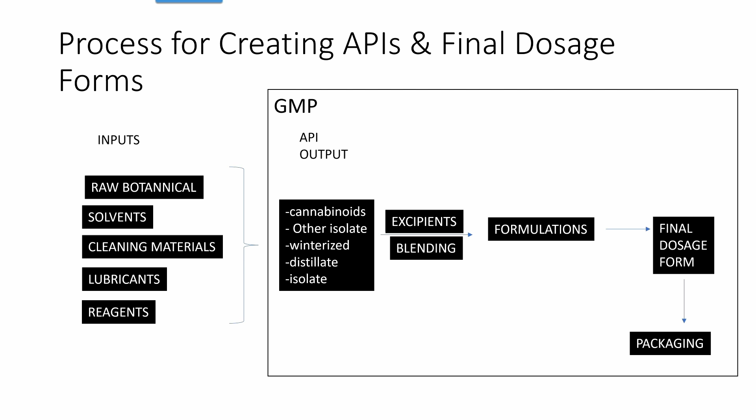Anyways, we've all seen this. We've talked about it so many times. This is the basic layout for the process for creating APIs. You have your inputs, which are your raw botanicals, your solvents, your cleaning materials. You could add into that now people. You can add in facilities. You can add in now the environment. There's many layers of complexity with this, but just try to keep it simple. Basically, you have inputs with API outputs.

API meaning active pharmaceutical ingredient. Those outputs, in our case, may or may not be cannabinoids, or distillates, but they could be other things, beneficiated oils, flavonoids, anything with a chemical specification. We talked extensively about chemical specifications and how that's important when you really define all that stuff. Got some formulations, you add those cannabinoids in with the formulations, then you get final dosage forms, and then you go into the packaging.

So we've been talking about these subjects for several weeks now, going through the Q7, which is the ICH GMP, the good manufacturing practice. It's codified into law in Europe, it's guidance in the US. It still is used. We've actually read from the Q7, so if you get a chance and you want to go to sleep, there's a lot of really good items in there. One of the things you really need to think about with a layout is you need to follow a development process.

We have talked extensively about the process of creating a layout. So far, we've talked about a risk assessment. We've talked about identifying critical processes, critical steps in the process. We've talked about external contamination, internal contamination.

So, anyway, getting back to that basis of design. It's so easy to get off topic. Yeah, when you go into the basis of design, it's just a set of codes. And usually when you look at a plan, maybe the first 6 or 7 pages are just a bunch of writing. Well, that's where the basis of design is at. Okay. And that's where they're laying it all out. Gotcha. And the plan that comes after that basis of design should correspond with that basis of design.

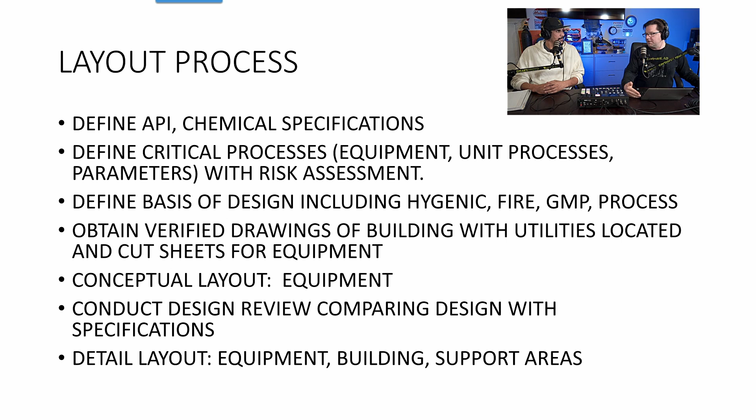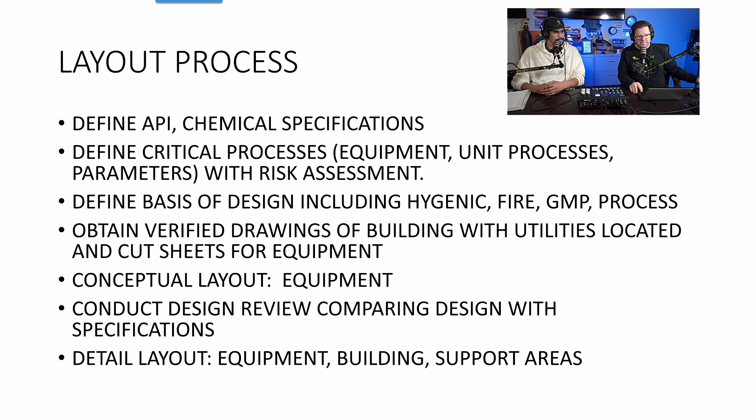Yeah. If it violates it, there has to be something else, like a different exception that maybe has to be a note in there that says, okay, this takes place with process and the equipment. Sometimes complying with it is impossible with just straight up layout and design. So conceptual layout, we get the conceptual layout, we do the design review, and then we do the detail layout. So very similar to what I just talked about, but it's really important that you get the stakeholders right.

Yep. And typically you want to have more than one person. You don't want to have just the subject matter expert. Put all your eggs in one basket. No, not a good idea here. You got to have that QA person there. How are they going to save money if they got to hire 10 different guys? No, that's 15 people. That's the problem.

Okay, we're just starting out. We got 2 people. We're going to do a GMP. Okay, who's your QA person? Who's your architect? Who's your subject matter expert? Where's your process engineer? And they're like, oh, we don't have any of that yet. Okay, we're just going to get going and we'll be GMP and whatever. Right. There's no GMP light, right? That's what a lot of people say. Oh, GMP light, it looks like GMP. Either you can pass the muster of going through the process or you can't. Yeah. These are the types of people that you need to have on your team.

Obviously. You need to have an architect, because the architect is different than the designer. Right. The designer is going to take into account all the process. They're going to take into account the utilities, the equipment, where it all goes, all that stuff. But they're not going to really do the architectural work, which is really defining how many feet of pipe they need. Or does that kind of fall to the designer in the layout? The designer would do some of that work, but he wouldn't probably do anything like defining all the

hygienic aspects of the facility, the surface finishes, all the details of the offices and stairs, and typically an architect will also work with an MEP engineer, which is mechanical, electrical, and plumbing. Okay. That's an engineered plan that goes with the architectural plan, which is the layout and all that stuff. Yeah, so you can see you do need a team. It's going to run into some cash as soon as you do this.

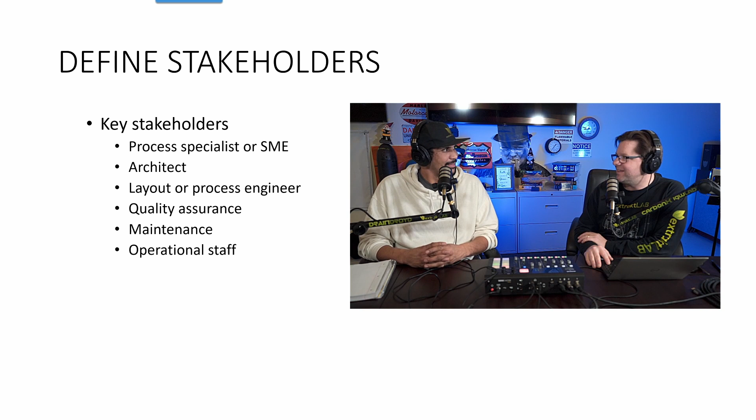We built stuff without drawings before. It's happened once or twice. Oh, we did, yeah. And it's difficult. I would say that it adds a level of complication. What ends up happening is you end up having to build it twice. Go back and fix things, and so design build. That's where basically you have no plan and you're just going in there saying, hey, go do this one. That's a really good way to spend $1 million on electrical or whatever. Yeah. It's almost better to have the plan, and then you can understand what your costs are going to be and get quotes and things like that.

So that makes it easy. Define layout scope. Okay, well, there's process areas and then there's non-process areas. So you've got your utilities areas. These are not really controlled areas. Your gowning rooms. Your laboratories, they're not necessarily controlled from a GMP standpoint.

Remember we had talked about the levels of control a couple weeks ago? So the levels of control are: if there's exposure of the API to the atmosphere, it has to be controlled. In other words, the surface has to be closed, the room has to be controlled. And so then you define all those levels of control and what that means in terms of the surface finishes, the ceilings, the windows, all that stuff. And then the pressurization in the room, the level of filtration in the room, all that stuff.

These non-process areas typically are level 1 areas. In other words, there's no control. You just have to keep it clean, that type of thing. An exception would be the dispensing, filling, sampling room. These can be level 3, a little bit more control. If you have your API going in there and it's being exposed to the atmosphere, then that would be a level 3 room. A level 2 room is a protected corridor between a level 1 room and a level 3 room. So a level 3 room is the highest stage of a room.

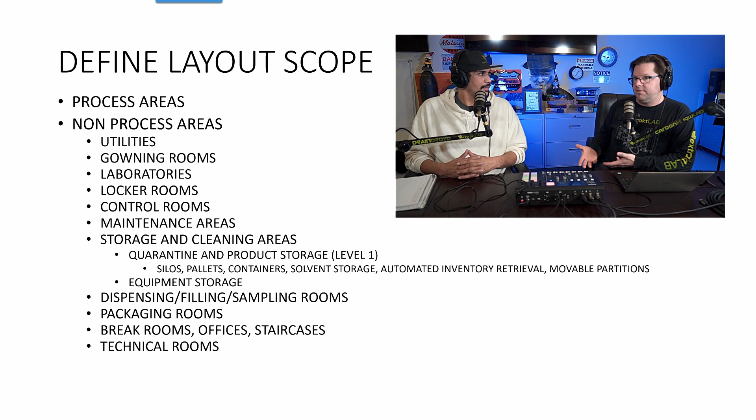A good example, we've been doing some silo work for hemp, and that's all contained. So it actually can be outside even. Yeah, but it's enclosed within its own area. Exactly, so it's all enclosed. Pallets that are wrapped, marked, typically barcoded, also would meet that, as would contained solvent storage.

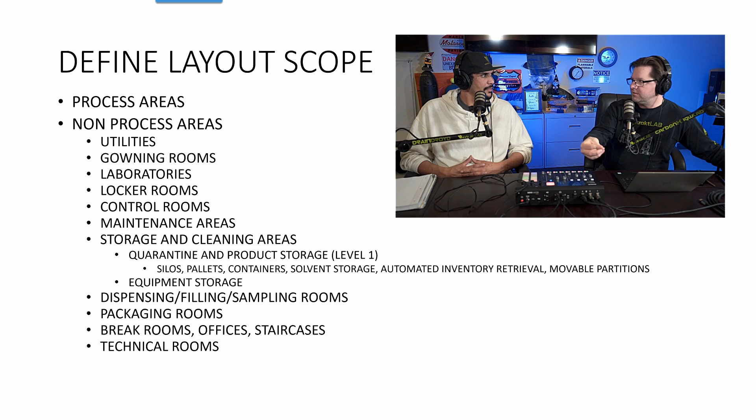So there's lots of different things, but when you think about the layout, you need to be thinking about what are my process areas corresponding to my critical and non-critical processes, and also those support areas and how they interact together. It's a bit of work to really think about all that. And there's a couple tools you would use. Typically what we do is an accommodation schedule. It's just a bubble map of how things interact together with the given processes.

It's just a very nice, easy way to say, here's my process. Like we said, there's different processes for different people, right? So this is going to change depending on what you're going to do, and it's also going to change based on the risk assessment you do. Absolutely. And people assess risk in different ways. That's why you need inspectors there to take a look at it. There's no such thing as one size fits all.

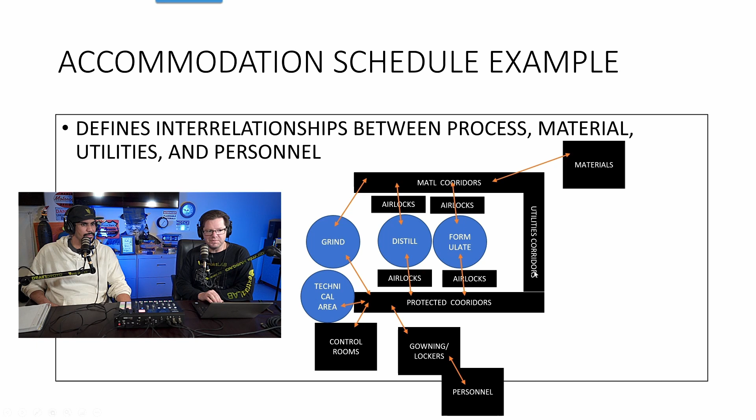Obviously here we have no interaction between utilities, but that's not actually how it is. There's glycol units that typically go in and out of a room. There's HVAC that typically goes in and out of a room, whether it's a hood or filtered simple air, venting. We got pneumatics or vacuum. Maybe you don't put the vacuum inside of the room, sometimes people do, but it's better if it's outside the room and you just pipe it in.

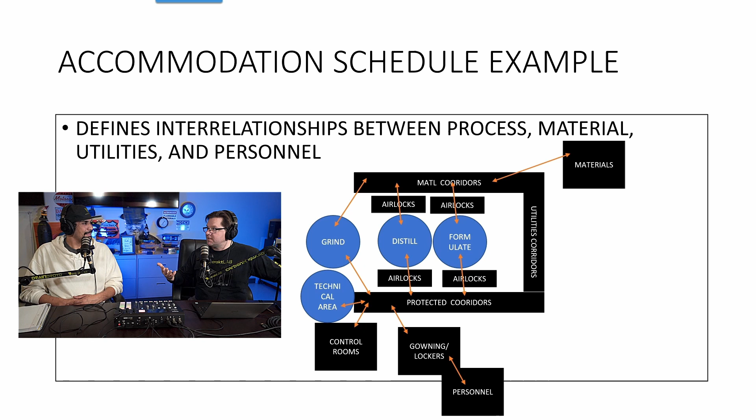I think we hit a lot of them, but some of the utilities can get very complicated. Oh, cryogenics, like with CO2, right? So a typical extractor would have a cryogenics loop, a glycol loop, maybe a heating boiler loop, an air loop for all the valves, and a venting loop. So you have basically 5 or 6 process connections, including the electrical, just for that one piece of equipment.

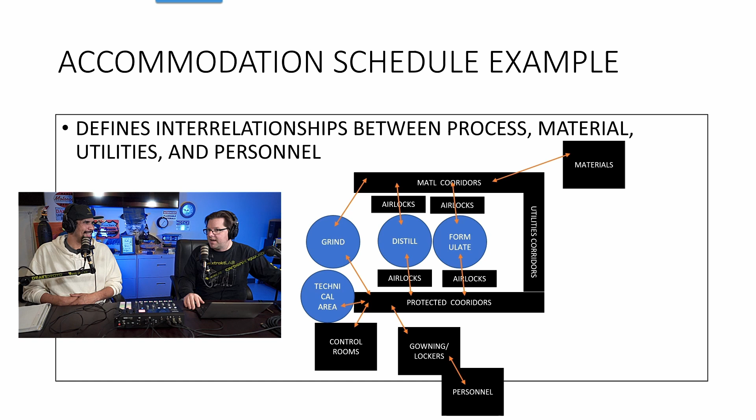And then those things also have proximity requirements. This has to be this close and it can't be this far away, or it's not effective. You don't want to put your vacuum pump 50, 100 feet away.

For example, grinding and extraction. Is it required? Probably not, but it's important that it's close, for efficiency. You're not going to tramp around with raw material coming out of your grinder, bringing in the dusty grinding material through the distillation room, through the solvent removal room.

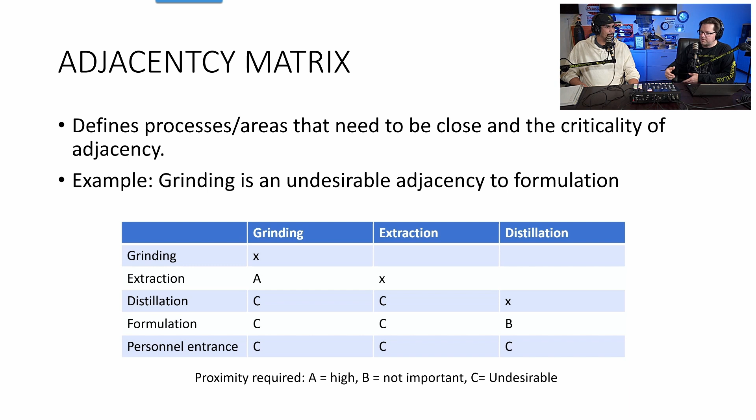This is pretty much common sense, guys. If you do the adjacency matrix and the accommodation schedule, these two things really work together to give you what you need to do an initial conceptual layout, so you can know how everything is.

We've had engineers who say, okay, I've done lots of GMP engineering, I know everything about it, I've done pharmaceutical facilities around the world, great, good for you, so I can do everything.

So they go in there and they don't do the adjacency matrix with us. You're like, okay, how much have you really done it? You're not even asking the right questions, they have a very narrow scope. They didn't do the accommodation schedule with the equipment and the personnel and the process, and they haven't done the risk assessment, so they're just going in there blowing a lot of smoke.

And at the end of the day, you have to make sure that these things are taken into account.

One of the things that a subject matter expert would really bring to the table is maintenance areas, cleaning areas, introduction of SIP or CIP systems—clean in place systems—for how that's done, and where all that stuff should be housed relative to the process. So you really do need to have the conversation, make up your adjacency matrix, and do your accommodation schedule, because if you don't do that and then you do the design, you're going to be doing it again.

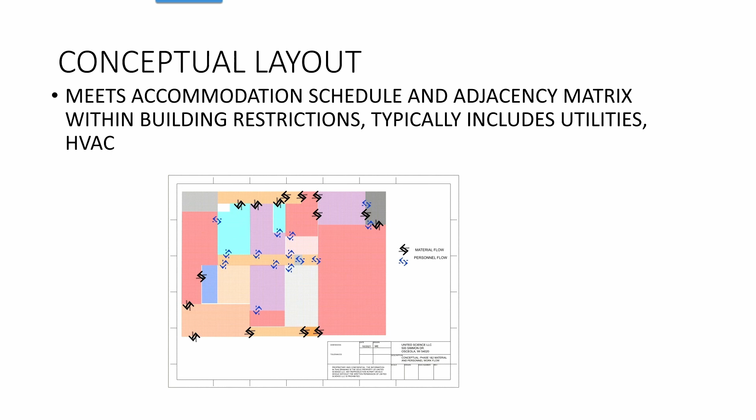The way I like to do it is I like to think about this plan and think about where's the possibility of dust occurring. So then in that area, if it's intermittent dust or whatever, I like to put it under a negative pressure, and then design or conceptually lay out what that HVAC might look like with those negative areas of pressure. It's all being built around that.

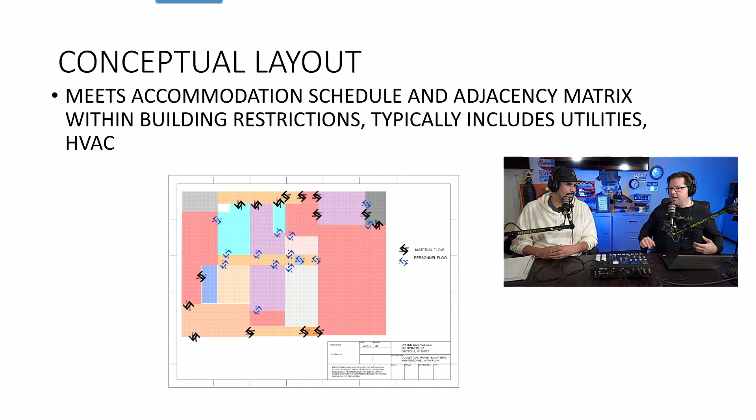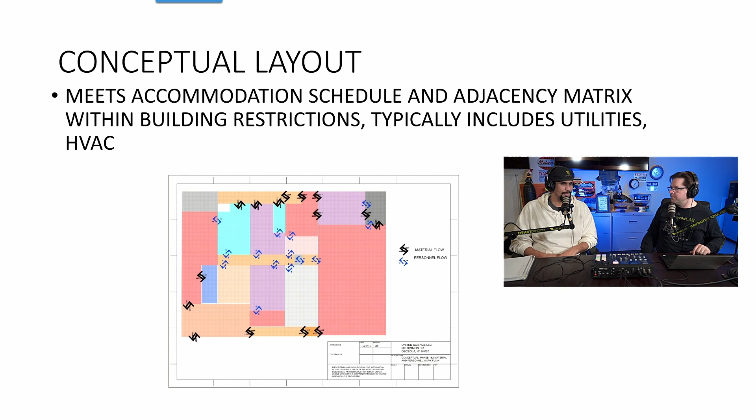You probably don't want to have, for example, your solvent areas, if there's any solvent exposure at all, under a positive pressure, because it would blow the solvent out into the other rooms and contaminate those areas. So relative to the hallways, suppose you have a solvent area right here in this purple area—you probably would want to have maybe this negative pressure, and maybe this just a positive pressure. Typically what the HVAC engineer would do is take that design and say, this is what I need to think about, and then they would specify the relative pressures for each of the rooms. So it works together.

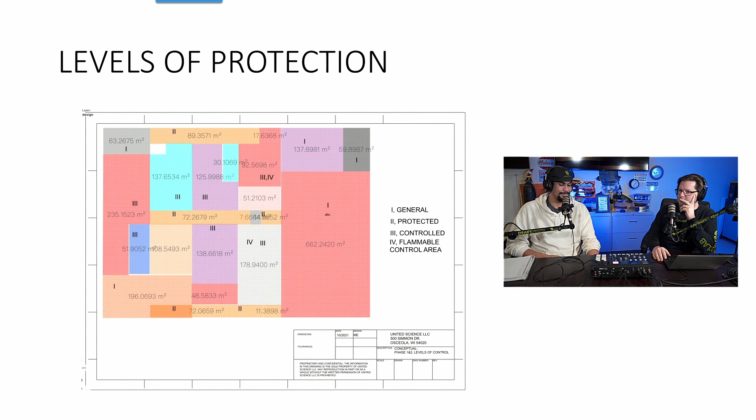Trying to cram too much into too small of an area. The Q7 says you really need to have adequate space to run your facility. There are some critical dimensions associated with the equipment — for example, you have to have 2 feet around, or 3 feet clearance, with some pieces of C1D2 equipment. You can't just stick it up against the wall and say, hey, I got enough room.

If you only have a 10-foot by 10-foot room and a piece of equipment that's sticking out from the wall 3 feet, that means you only have 4 or 5 feet left on that side. So you have 4 feet left — that's not enough room to actually run a process in there. You need to have enough space in order to get that done. So that's something to think about.

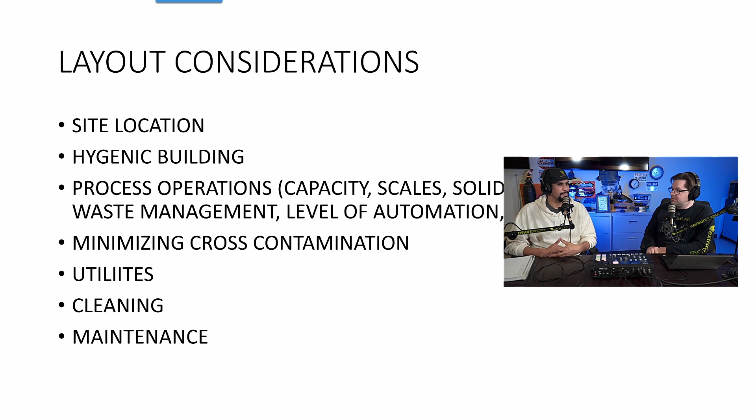So speaking of layout considerations, here are just some things that are on the top of my head. Site, obviously, we talked about that. You don't want to put your place next to a cyanide plant or a pig farm, or downstream of the prevailing wind from a Dow chemical plant, or in a place where there's heavy amounts of smog because there are too many ethanol extraction guys in there — an extraction hygienic building, for example. That's one thing you need to think about.

And we talked a little bit about some of the principles there. Last week James and I talked a lot about just the requirements for hygienic buildings. I don't think any of these things are hard rules, like you absolutely have to have them, but there are some things you need to be thinking about.

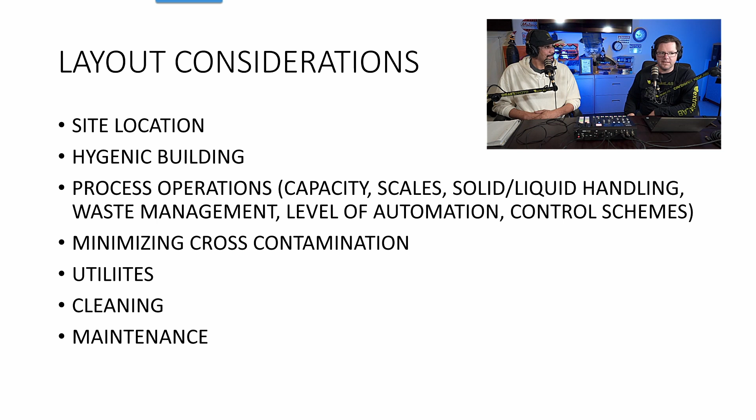A lot of this also has to do with what your general philosophies are associated with automation. If I'm going to be like an uber-automator guy, I'm probably going to have a different facility than if I don't mind manual, discontinuous processes. One thing that we've been doing is putting all of our processes together, for example, extraction all the way through distillation.

Are they ready to hear about that continuous processing? Exactly, so you get it out. We could bring it all the way through. What would be great is if you could put the stuff in one side and it would roll out the other side, like a vapor pen or something, just the pen comes out. That would be really nice. Okay, that's impractical, unless you're selling billions of vapor pens, which you're not. But at the end of the day, there are so many things you can automate within a process to reduce or eliminate handling. That's what you're really looking for.

And also to reduce those level 3 areas, which are expensive, right? So if you have a continuous process and you can put that all in one level 3 area, then you're fine. That's going to save a little bit of money. So your extraction, you can put in one area and then pipe it to a different area and have it finish up, and nobody has to essentially touch it until it comes out.

One of the things you want to make sure is you try to minimize overhead piping, because some of that piping can get full of dust, or even condensation if it's not insulated. You should insulate everything, because that would cause microbial growth too. But if those pipes are up there, you should probably put them with a cover, like a PVC cover, so they're held in.

Then have a maintenance schedule that cleans them at a maintenance schedule. I noticed that our pipes in our facility are PVC coated, and then there's an SOP that goes in for maintenance to clean them off at certain intervals, since chemicals there are exposed to use. But those pipes are in level 1 areas, they're not in level 3 areas, so they're not affecting any of the product.

So yeah, contamination is obviously something you're going to need to consider. Utilities, cleaning, maintenance, these are the things you need to consider when you're talking about your layout plan, material and equipment flows. These are just some principles.

The Q7 talks about prevention of mix-ups. I have done designs where it was so constrained there was no possibility of having a proper material and personnel flow. The way the rooms were, all of the inputs and outputs were going through the same corridor, personnel and material. So when you do your personnel and material flow, all the arrows are overlapping.

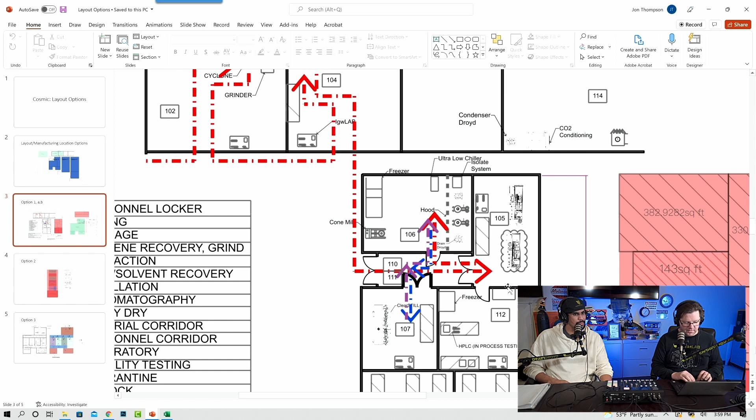In that first one, right here, this is obviously a bad layout. There's a lot going on in a little area there. Part of the issue with this particular layout was it was too constrained, and also I hadn't gotten information on where utilities needed to be and things like that.

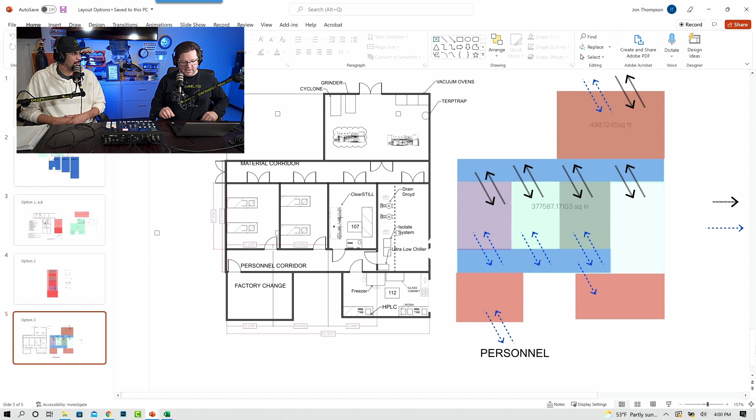That's just some different things you can see here. The idea here, again, is you would put in material and personnel flow corridors, which is much easier to do, and then you have different square footages associated with that. Here's some other different ways - you have personnel coming in from the bottom. You can do these block diagrams to get to the idea of, okay, here's a bunch of options, because getting into the engineering for each one of those options would be impossible. You'd be spending weeks and weeks, very time consuming, you'd never get anything done. So that's basically how that all goes.

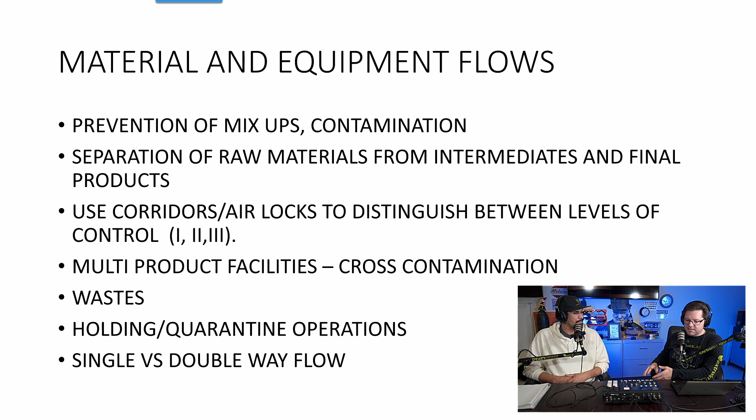So there's the material and equipment flows, separation of raw materials from intermediates and final products. Raw material in our case would be like hemp or some botanical, whether it's mushrooms or bark, or any other raw material that's coming in that's not the API that's coming out, which would be the extract, or would be a distillate or something like that. You really need to have separation of those.

I would separate out, for example, the receiving stations even, so where it's being received. If you're going to have excipients come in, if you have the option, bring in your excipients and your raw materials in separate areas. Certainly for storage - you don't want to have your raw materials stored next to your excipients, your solvents, your packaging, any of that stuff. First of all, it smells so good in here. But all that's going to get infused into your package, all those beautiful aromas and stuff like that.

So use corridors and airlocks to distinguish between the levels. Yeah, that stuff, all that smell would actually get into your beautiful packaging, right? Yeah.

Someone may consider that to be contamination. I mean, I wouldn't... yeah, I could see why you don't want to. Like, this box smells like weed. Okay, so then you try to ship it somewhere, and the box smells like terpenes. So that's something you got to think about, especially with the aromatic nature of botanicals — that tends to permeate everywhere. So you need to make sure things are protected.

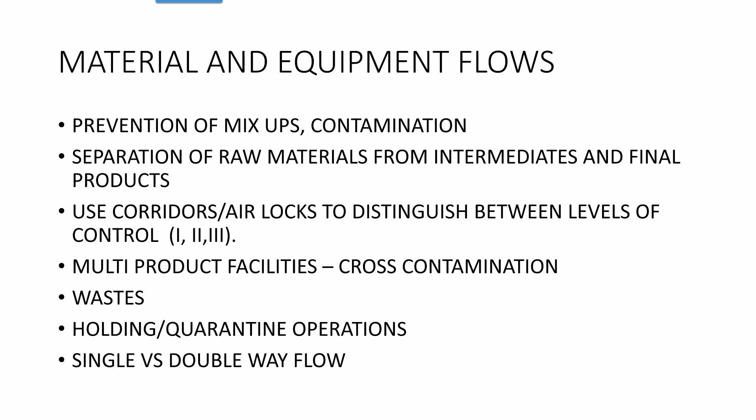And you do the airlocks for that. Also, multi-product facilities — we just named a whole bunch of different botanicals that could run through one particular extraction facility. So those are multi-use facilities. Those have very specific, special requirements you need to be thinking about, having to do with how you're separating out those materials from everything else, where you're storing them, how you're quarantining them, and all the cleaning — cross-contamination on your machine.

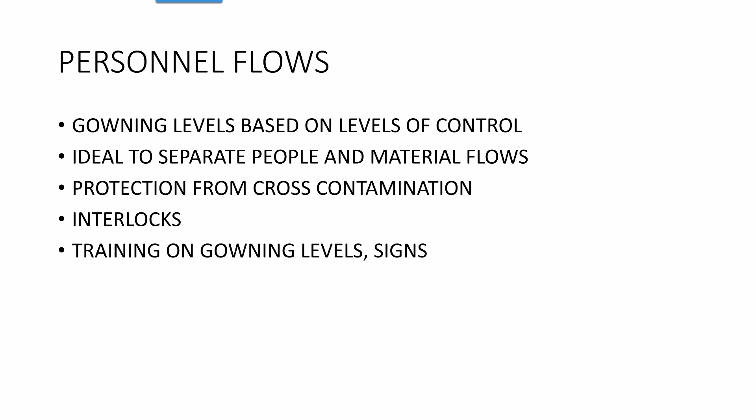Single versus double way flow. That's something we showed you before with that crazy diagram. Oh yeah, that wasn't my finest hour actually, when I did that one — late at night, I was like, oh, this is the only way. Sometimes when I do some work I'll just sit there and think about it, and it might take me a couple hours, like, what is the best way?

Sometimes, because if you have a whole building, you're going to have a portion of the building, and oftentimes it's connected to a grow. So you need to really understand, okay, where's your material coming in? Yeah, that adds a whole other layer of complication.

Usually you have problems when things get really small. You can never have too much room, by the way — no, it just seems like that. People want to put them into really small areas, and it's actually violating the GMP principle of having enough space to actually operate — like two to three feet between pieces of equipment and walls.

Sometimes what designers will do is create a level 3 room, and then they'll pull out the equipment and put different equipment in there — because they can do different processes in the same room, and that room costs them a lot of money, being a level 3 room. So a lot of times, in that case, you need to have an idea about equipment storage and where to store it.

You'd have to have that thought out way ahead of time, like, okay, I'm going to do this, how am I storing it? Some people, with smaller facilities, may want to have those things and then have multiple utility hookups in there.

So anyway, personnel flow — just some ideas there for you guys. Usually you would create a gowning level schedule. Right, gowning schedule, yeah, we have a gowning level schedule. We do that all the time.

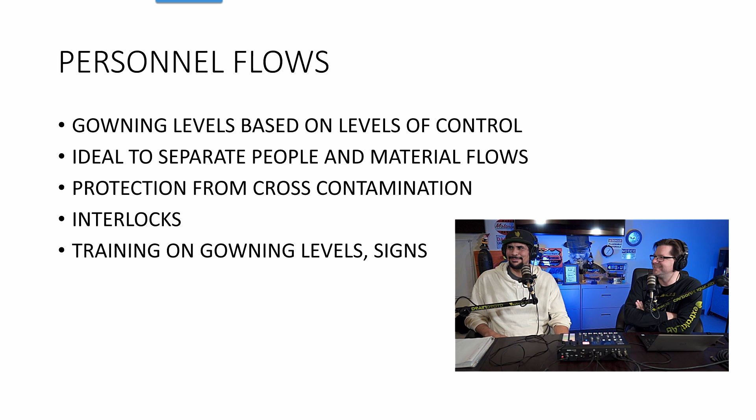You go out to eat, or whatever. A gowning level is like pajamas, okay? You don't go out to eat in pajamas — well, maybe some people do. No, I haven't in a while — maybe back in college. Yeah, when I was younger, there's some... there was no gowning code there, and no hygienic code either, from what I remember. That was something else entirely.

Yeah, the gowning levels — typically what we would do is every room would have its own set of gowning level requirements, and sometimes you can group those: gowning level 1, gowning level 2, gowning level 3, depending on how close in contact you have to be with the material, like API, for example. So if you're out in the warehouse doing raw materials, doing forklifts, you'd have steel-toe boots, gloves — maybe not your street clothes, a different set of clothes. But if you're in a level 3 area, you might have booty covers.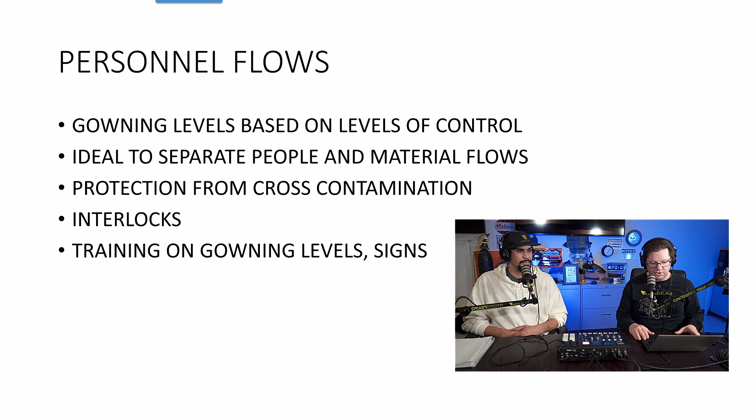Hairnet, beard covers, gloves, all that stuff. Yeah. So there's different levels of control, and you may have respirators or whatever. Interlocks are another thing. Training on gowning levels, signs, things like that you need to have in your personnel flow. And then facility construction issues.

I'm almost done with this, guys. I could talk about this for a long time. I'm telling you, he's done it before. No, I'm kind of kidding.

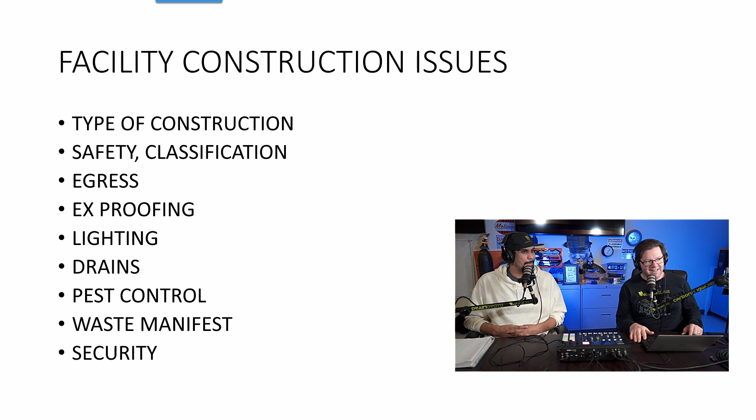Construction, safety classification. In other words, one of the things that people don't realize is that if you have lots of ethanol in your facility, you may be classified as an H1, H2, H3 hazardous occupancy. Usually you want to reduce the requirement for your building by going into an F occupancy or a general industrial occupancy. That makes sense. Egress is another thing that you need to think about, Ex-proofing, lighting, draining, pest control. These are things that we address in our designs and in our design protocols, and then waste manifest and security.

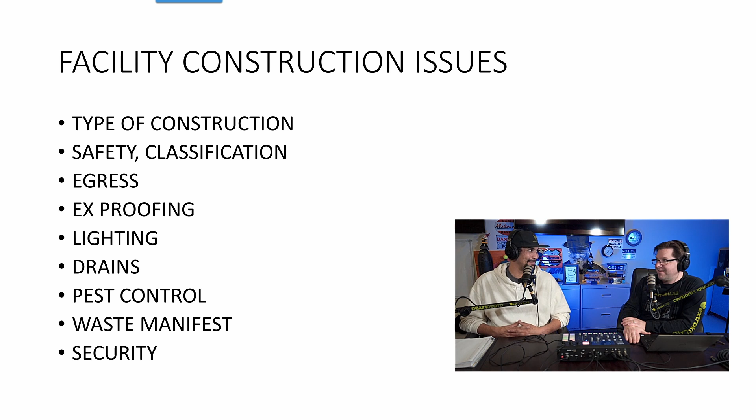Actually, our design offering is by far the greatest deal. Everybody that gets them absolutely loves them because I don't think they expect all the information that we actually provide. Yeah, so it's a lot. We're paying engineers, but at the end of the day, you're getting a good design, you're getting a good plan, and so on and so forth. It's very important that you have a good subject matter expert working with you on that.

And it's not just pharma, it's also process. And it's not just process, it's also specific equipment know-how. You can see how that all would have a huge impact on your design. Definitely. So if you have a process designer and they're working with their architect and you say, hey, where's your adjacency matrix? And they go, huh? Then maybe you got the wrong guy.

If you are working with your designer and your subject matter expert and your quality control people, and there's no conceptual drawing or interactivity diagram, as a lot of people will call it, you probably need to think about that because that's the very basis of what you're doing. And if you don't have your risk assessment done, you kind of need to get that done. You need to be thinking about that with your subject matter expert. They're going to be bringing that knowledge to the table and saying, hey, here's what I've seen in the past. Here's why this is critical. You really have to understand what those critical processes, critical units are and everything.

So hope that helped, guys. I think it helped a few people out there. We get a few calls every week about people looking for this kind of stuff. The number of plans that we've done has just skyrocketed. So lots of plans going out. People like it, because I personally check the drawings. I don't know if that will continue because I'm spending a lot of time doing that, but I want to make sure that it's perfect.